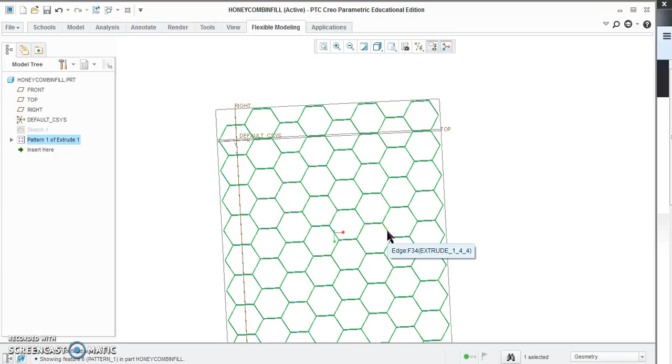Hey Gears, we're going to learn how to make a honeycomb infill pattern today. This is going to give us more control over the B-box design. It'll also help you better understand how to make a sandwich panel for fabrication, which will save us in materials, which will save us in cost, and hopefully won't cost us anything in terms of strength.

So this is an example of what we're building toward. This is a honeycomb structure. It takes advantage of some of the things that we've already learned how to do, such as mirror and pattern, and it shouldn't take us too long to put together.

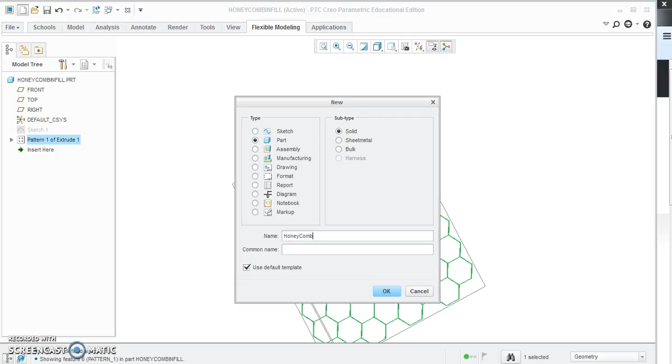So let's go ahead and make a new drawing. We'll call it honeycomb, call it anything you want. Call it infill 2, that's fine. Click OK.

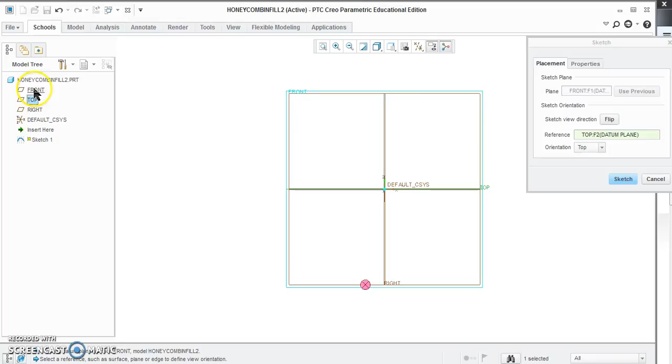So the first thing we're going to do is put our orientation to front. We're going to use a new tool, so we're going to go into tools, we're going to make a sketch. And the new tool we're going to use is the palette. So if we click on sketch, go into more, go to the palette.

The palette has all kinds of polygon shapes waiting for us to use, so we need the hexagon. We'll double click on that, put a hexagon in the drawing. So that's pretty good. I'm going to drag it to the center.

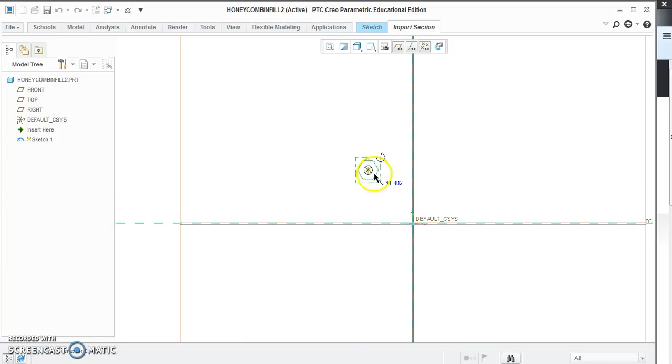Okay, I'm going to set the, let's go to the import section. We'll set the size to 20. That's just a size that I've been using. It seems to work okay. We're going to accept it.

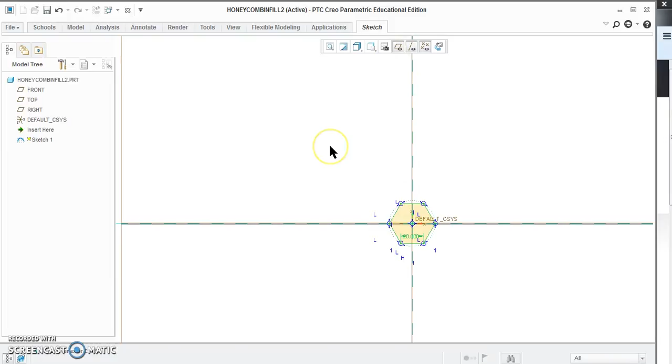So we've got our, I'm going to shift center click to reposition this. So this is our hexagon.

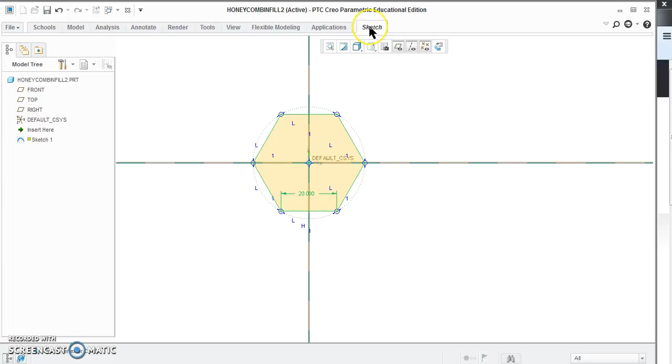And what I've discovered, and I experimented for a while coming up with this, making this a pattern that fills in worked easiest for me with 2 hexagons. And you know, there's multiple ways to do things, and sometimes it's your own spatial bias about how you think is the best way to get things done.

In order to make an identical hexagon, I'm going to put a center line over here. You can probably guess that if I'm using a center line, I'm going to be mirroring something, which is absolutely correct. I'm going to mirror it about this line. So I've got 2 hexagons, and I'm just about done with the sketch.

There's just one more thing that I need to know. I'm going to set up a pattern, and I'm going to translate this pattern here, 2 hexagons. I'm going to translate it down, and I'm going to translate it to the right. And I'm going to do them both at the same time to fill in the sheet. It'll go pretty quickly, but I need to know how far to translate it.

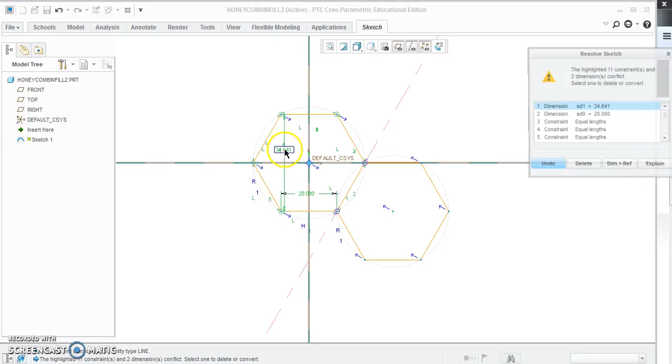So here we can see that this dimension is 20, and that's good to remember. We also need to know, well, how far across are, for example, these axes here, or these vertices here. So I went ahead and I can make that a reference, it's fine.

I'm going to go back in a sketch, and I'm going to drag this out just a little bit. And my intention here, and it's important to remember, that I'm going to take this whole piece and shift it down, and then I'm going to shift it over. We'll talk about why this works the way it does as we do our pattern.

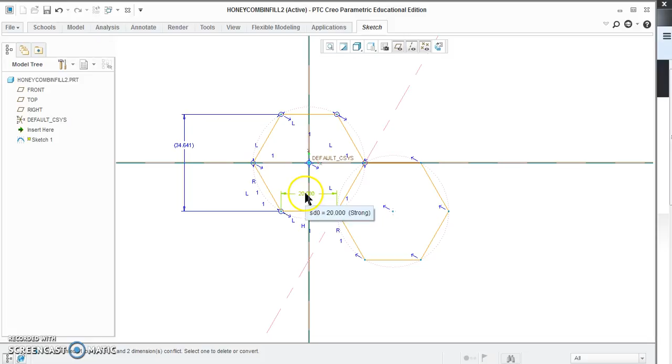But it's important you should write down these numbers, whatever they are, for the hexagons that you've selected, because they're going to be integral to forming our patterns. So far so good. And we're going to go back into our sketch mode, and we're going to accept it.

So the next step is going to be to extrude this. So I go back into Schools, select extrude. Go into my extrude menu. I can make this anything I want. I'm going to just set it as 5. That works as good as anything else for the purposes right now.

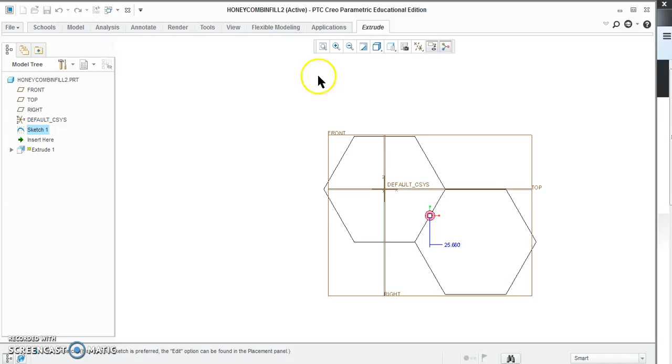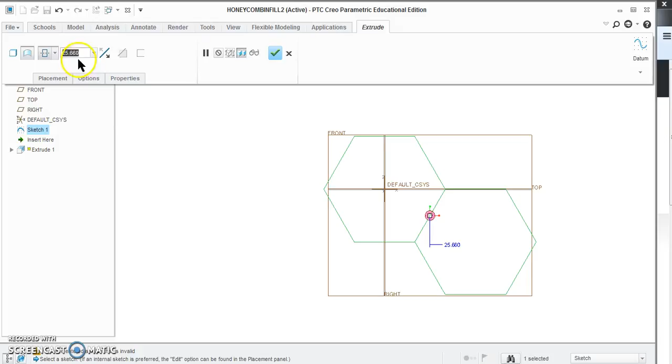Oops, let's get bigger. That's fine for now, we'll just make it 25. We can take a look. Whoa, that's a big honeycomb. We can change it later if we want.

So I've got my extrusion, and the reason I'm not doing any number of other ways to approach this is that you can lose pieces when you try to extrude. So now I've got my extrusion, it's selected. Go back into Schools, and I'm going to make a pattern.

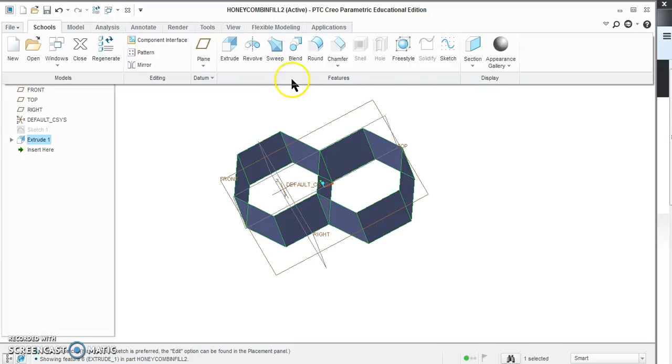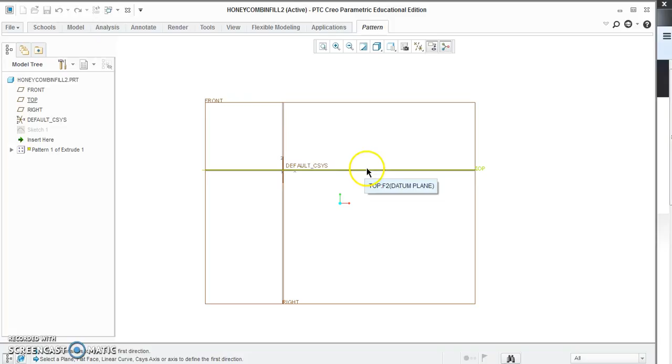So I've got my shape. If I want to see it better, I can go back to my orientation, go back to the front. Now I'm going to go into my pattern, and in this case I am going to do a direction, and I'm going to go across, which is the front in this case.

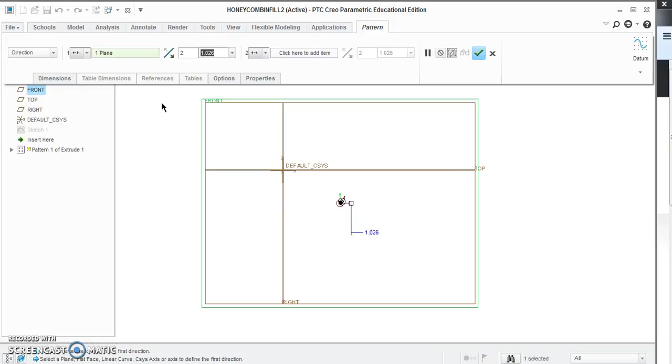Is that coming toward me? Looks like it might be coming toward me. Let's just get started, and we'll see where we go from there. I go to my pattern, and I want these to not be 1.026 apart. I think we're going to want 34.64 apart. Let's go ahead and take a look at what that looks like.

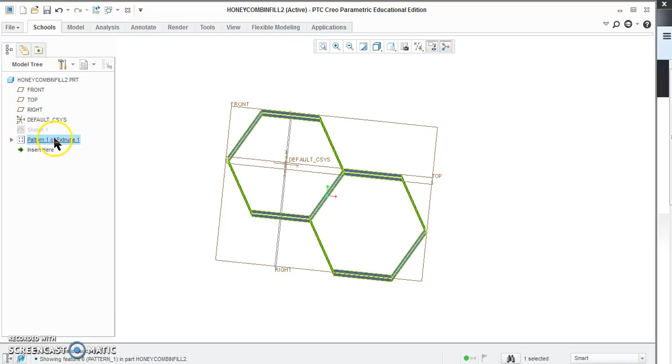And we can see here that what we've done is we've kind of stacked the hexagons, which wasn't our intention. So I'm going to go back into the pattern and change the definition. So I picked the wrong direction to rotate in. So instead of the front, let's pick the top and see if that's better.

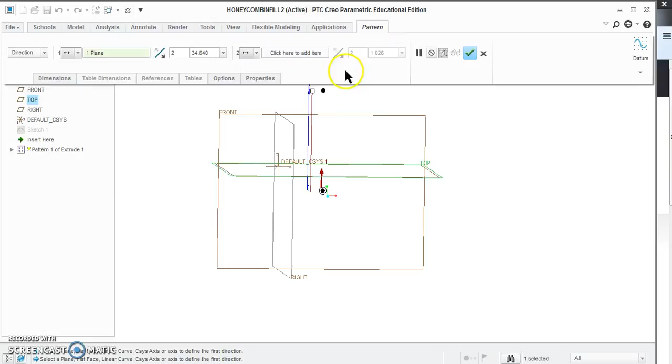So we've got two, and oh, that looks a lot better. So what it's done right now is it's made a nice copy of this. And that looks pretty good. Let's go back into our pattern.

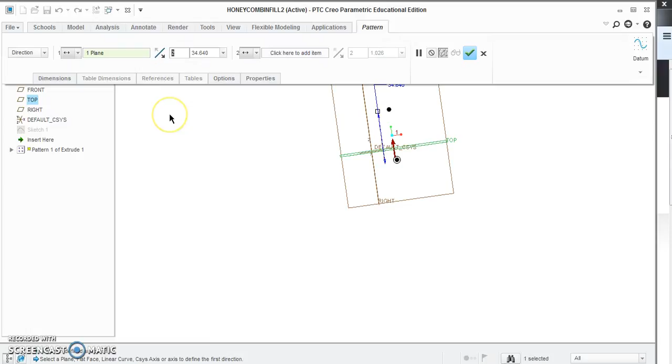And just to get a handle for what this looks like, we could make 4. And we can see now that our honeycomb is getting longer in this direction. So this original pattern was copied 4 times. And that's pretty cool, that works just fine.

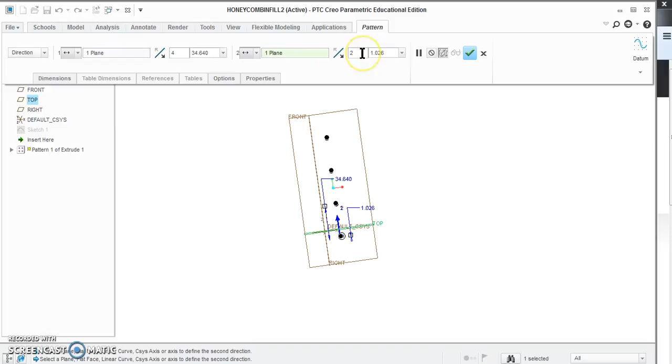Let's go back into our definitions. The great thing about pattern is we can do it in more than one direction, which is what we want to do. So let's go ahead and select the top, and let's do this twice. And this distance, let's go ahead and set at 34.64 just to see what it does.

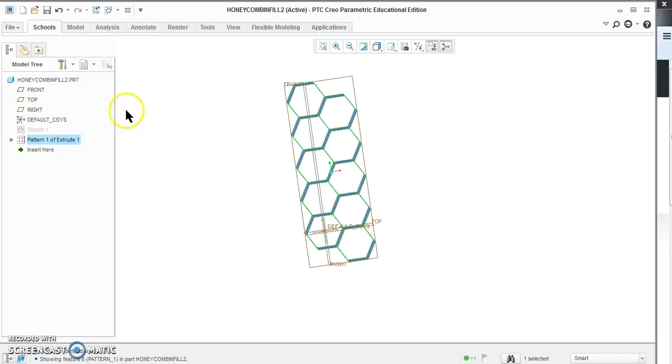And we can see that it really didn't do anything. Let's go back into our pattern so we can figure out why. We've got 2. See here where it's showing. What we want to see is, oh, they're going the same direction.

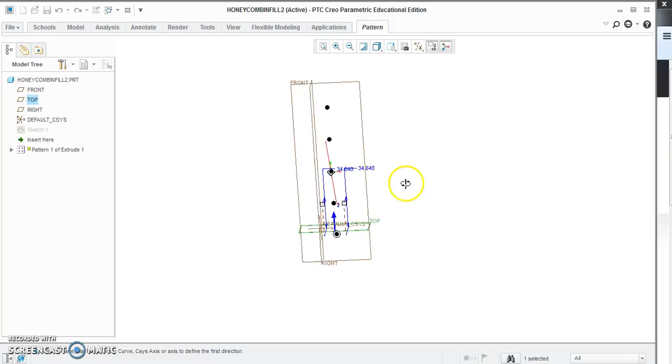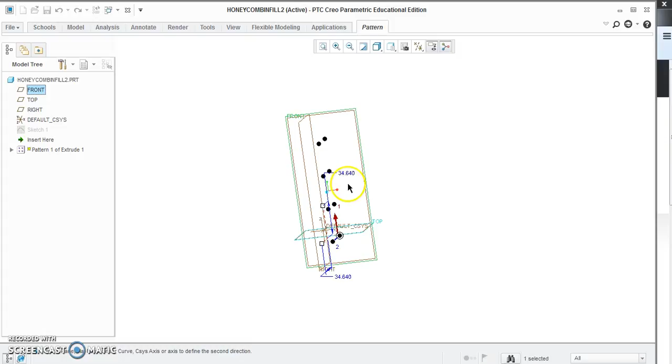So we want to go ahead and change that. Have them go the other way, let's see how that works. Oh, we made a stack again. So sometimes it's okay to just do a little trial and error to get things sorted out. Oh, that looks much better, doesn't it? So it was the front that we needed.

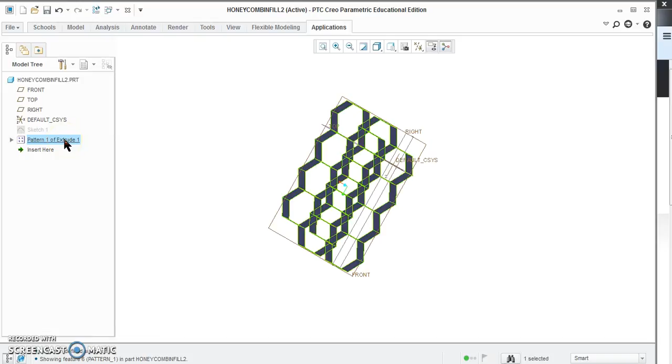And we can see here that, oh, those are not exactly the way we wanted them. Let's go back into our pattern. And they're not quite far enough apart in this dimension. Let's make them 60 apart.

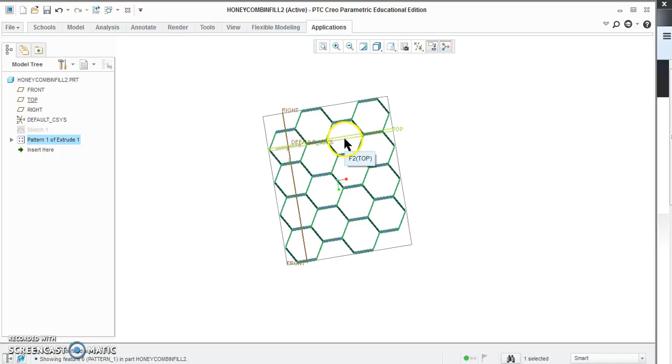And that's perfect. And the reason I came up with 60 is that it's about 2.5 units across to start the next one. If each is 20, so you've got, or 3 units across rather, so you've got 60, 20, 20, and 20. And so I can go into this pattern now that I've got it established.

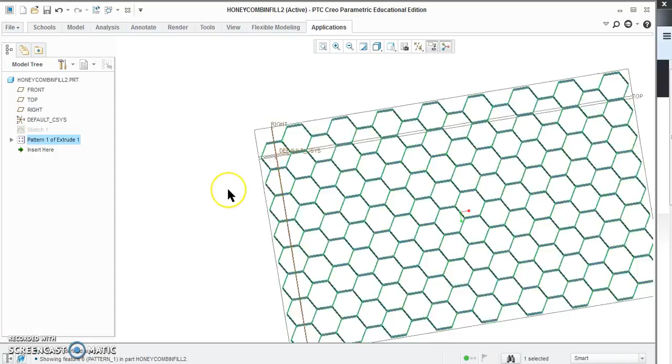And I could make it more if I wanted. I could make this 8, make this 8. Click OK. And now I've got a giant honeycomb pattern. And you can imagine that we could do a little bit of math to figure out what it would take to fill in a panel of any size with a structure like this. And that's in fact what we'll be thinking about as we move forward.

So this is a honeycomb pattern that used mirroring and the pattern tool. It's a new way to approach making some drawings. I hope you guys enjoy it. It's a little tricky, it takes some time, but this is a good next step.